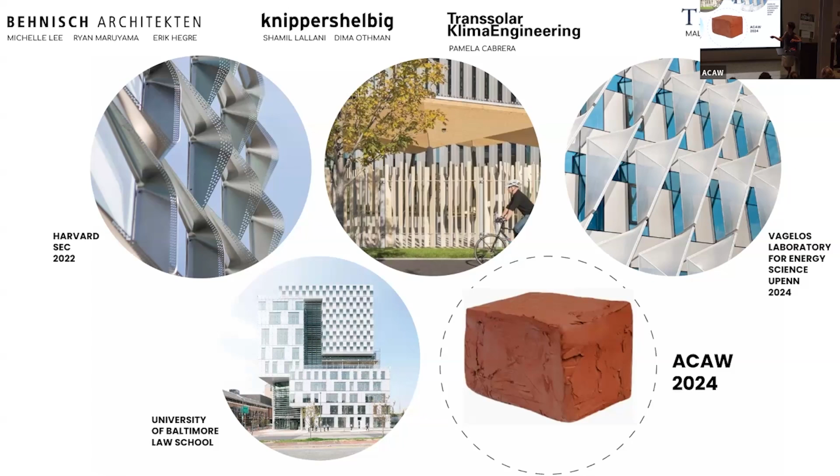I'm going to try to bring in as many of the other presentations into our presentation, just to keep you guys all awake. This is a reference to Gustav's keynote with the Olympics, he had this Olympic-themed presentation that I thought was timely. These are some of the projects we've worked on together with Molly's team, Pamela and Shamil, and we thought Terra would be a great completion of this constellation of work.

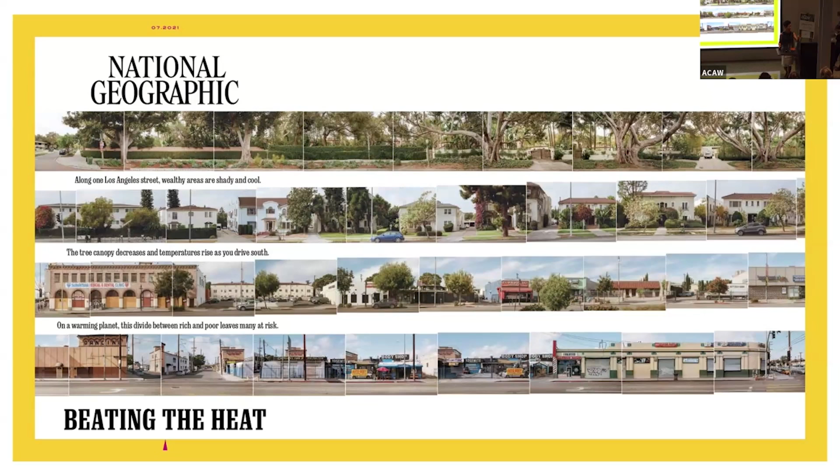With this amazing opportunity, it's such a privilege, and what do we do with this? We thought, in the absence of clients and all these constraints, what's the biggest problem we can tackle right now? For us it's climate change, and in particular the urban heat island effect. We all come from urban cities, Berlin, Lima, New York, Boston, so it's a global issue.

When you think about facades, Mic Patterson has this facade tectonics slogan: better building through better skins. I think we can expand that and say better urban spaces through better facade skins, because the cumulative effect of all this building material isn't just about the people paying for the building and the clients, but about the people occupying these urban spaces.

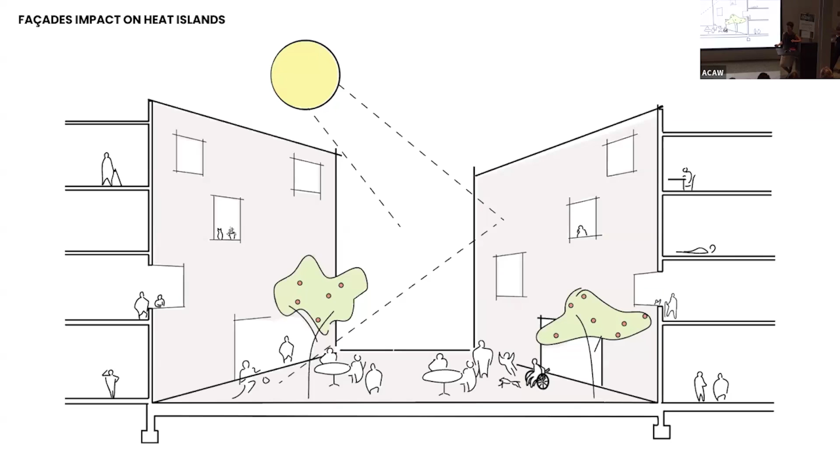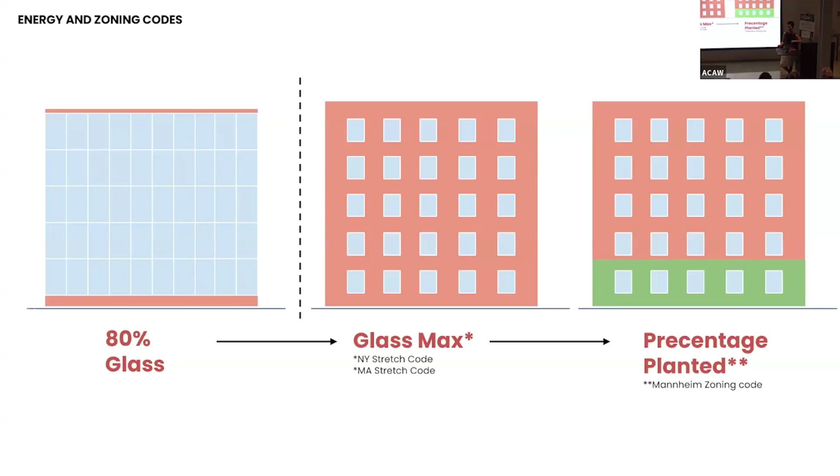Everybody knows this, but the trend is going in our favor. People know that glass is a problem. We're already seeing this being mandated in many progressive building codes. The United States is probably not the most progressive. In Germany we have lots of competitions where we have to actually design green facades or green roofs. This is really important for us.

Play. I don't know what's going on. Ryan made this. Oops. Sorry, the videos are always...

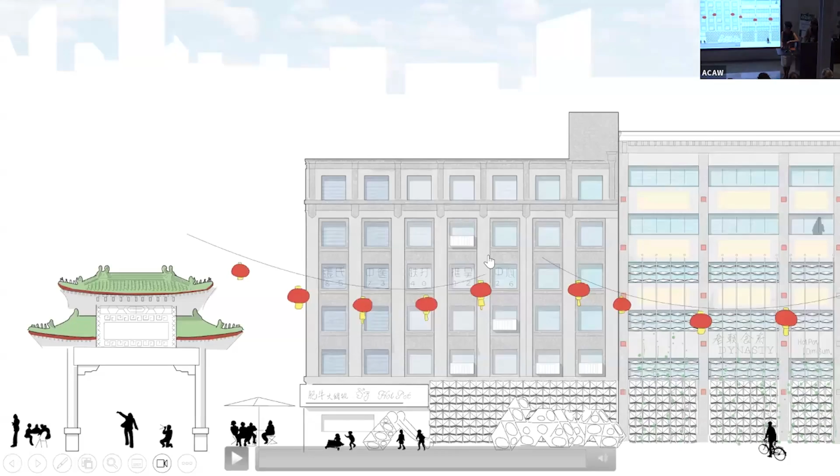There you go. Oh, I just click on it. Sorry, okay, I got to do the two-handed thing.

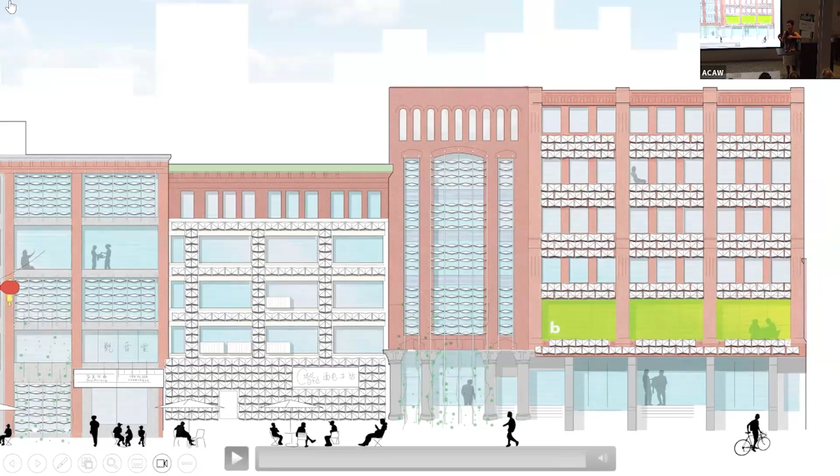Ryan Maruyama from our office made this scrolling tapestry that shows what this community means to us. Our office is right up here on the second floor, so we put this together because they're kind of our clients. Since we don't have a client to design for, we want to address this issue.

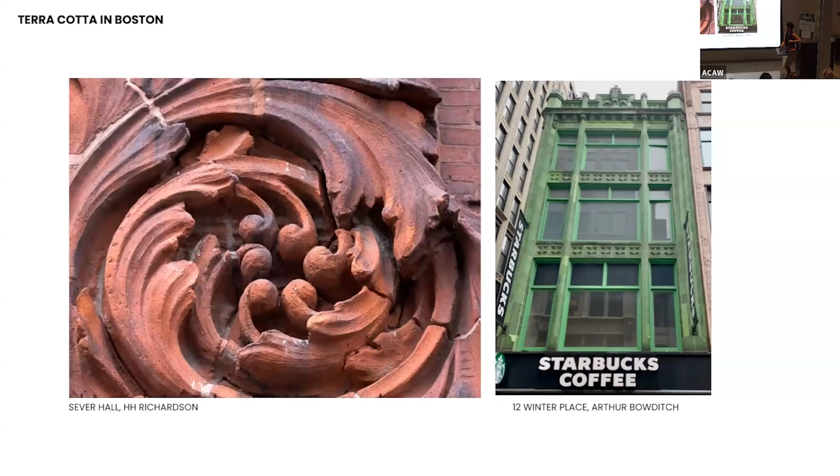Early on we did all these crazy studies - we were so excited. We did these before we talked to Andy and Andrew, and after we showed him, most of these didn't work. He'd tactfully say, is it important that this goes to market? Would you want this to be affordable and mass produced? We said yes, so he said, okay, don't do most of these.

In one of the presentations yesterday, I think University of Michigan told the students to work with the rainscreen - to start with that and build off of it. So we're doing a hybrid between two typologies we know work, that have been around for centuries, and trying to take 2 inches and see what more performance we can get out of that.

So instead of just deflecting the water - we saw the same slide, it's the zeitgeist - we're trying to spread water over the surface like a shingle, but instead of running straight down, we're trying to make it run diagonally and slow it down as it runs through the building. Does that make sense?

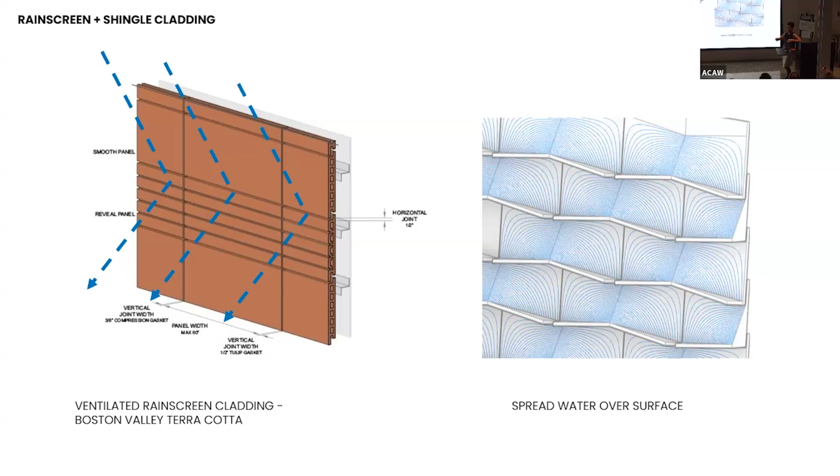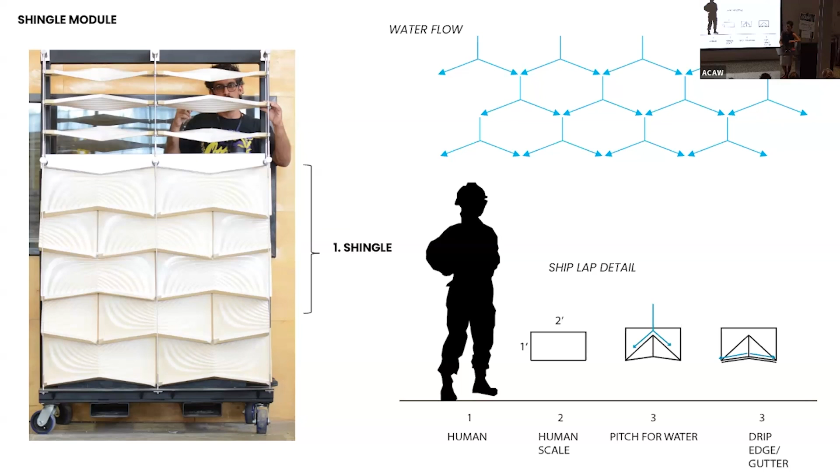So why does the module look like this? Well, first of all, the shingle, the brick - it's an ingenious way to make something modular so people can actually install it with ease. One person, Eric, is the only one who can carry it himself.

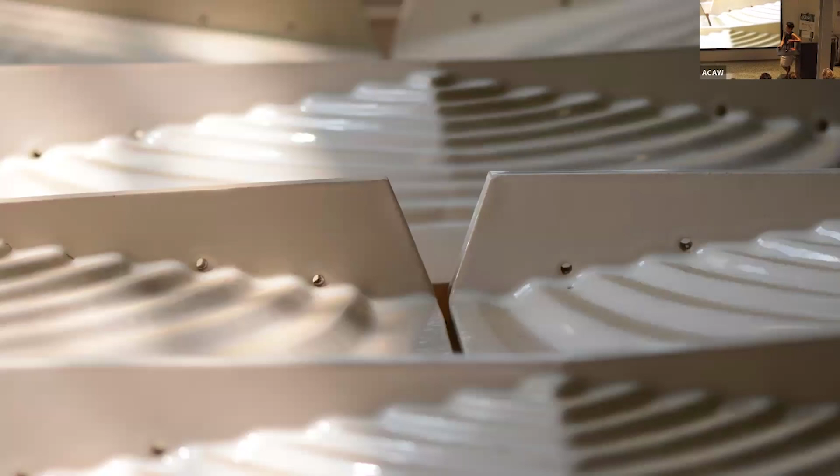This is the perspective from a raindrop. If you're a raindrop, you're traveling down this ridge, then you go to the sides where we turned up the lip of the shingle, then travel through these miniature canals, these grooves, and into the weep holes. It's about slowing the journey down, if that makes sense - just playing with gravity and movement of water.

So the second module - that was the first module. The second module is a little different. If you look up close, they're not the same - it's kind of inverted, with little textures made to absorb more water. These are allocated at the lower part of the building where people hang out, because we don't need evaporative cooling where there are no people.

We were also looking at these amazing, bizarre rusticated podiums you see in Renaissance and neoclassical architecture, with weird grotto patterns. They're always at the base of the building because they reference the earth. At the top here you can see a little more detail - this is one of them installed in the shingle method.

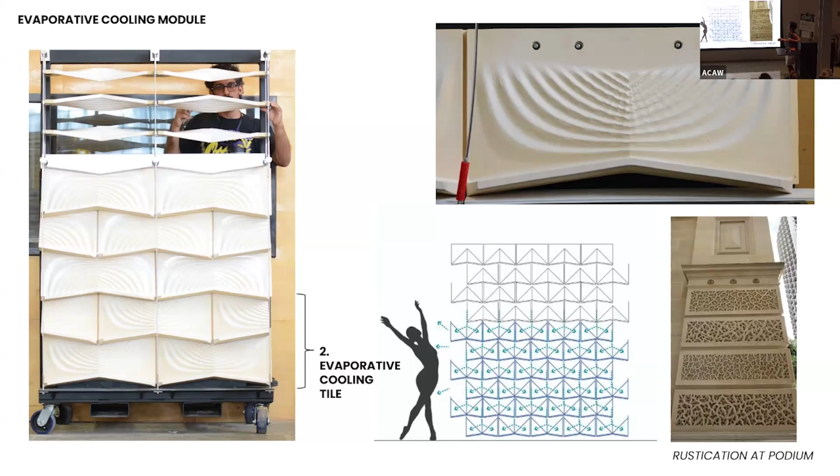And then the third module, at the top - wait, I don't think this works when you point the laser at the model. The top one is the screen module, and it's a way for us to integrate apertures and think about sun shading, while working it with this opaque surface that we have.

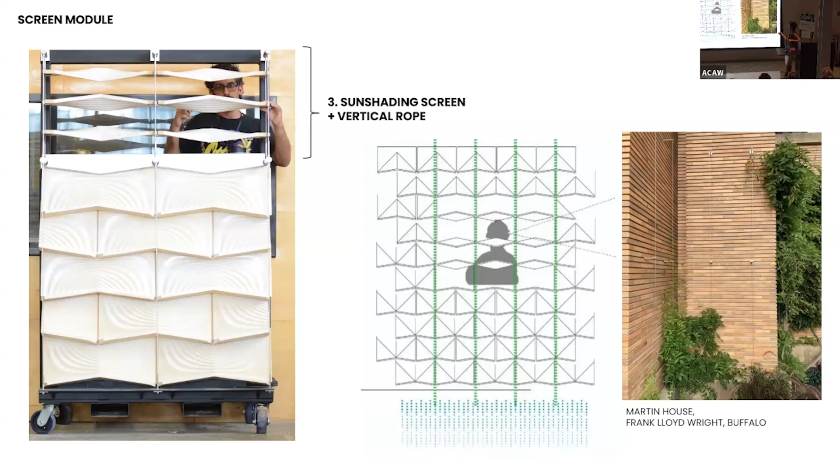We also decided to incorporate these trellises to continue the green planting theme from last year, but not make it an actual planter, because in New England that wouldn't work - freeze thaw issues. So these are easy Ivy League type light trellises. The picture on the right I took at the Martin House during our evening there - they have the same system we have. I'm pretty sure we came up with it first.

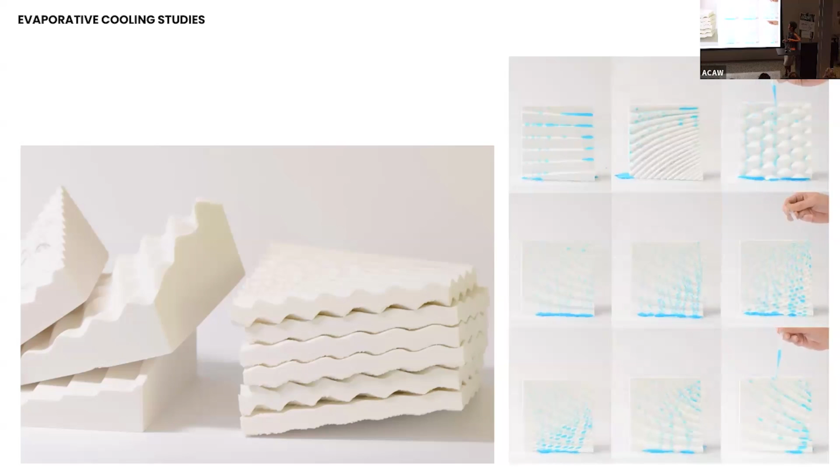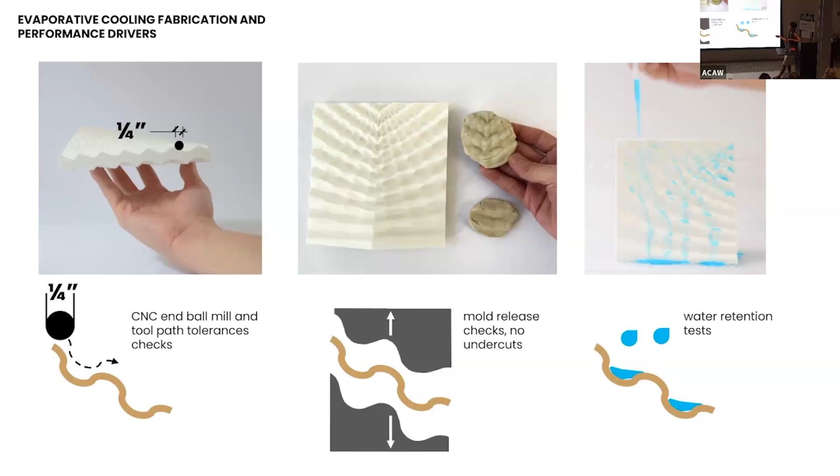We saw that with a professor from University of Michigan's presentation, Professor Ng - these beautiful woven things. We tried to do it in the texture of the surface so it can function as a rain screen, and also for mold release. So toolpath, mold release, and water were what drove the design. A little bit about working with Andy Brayman.

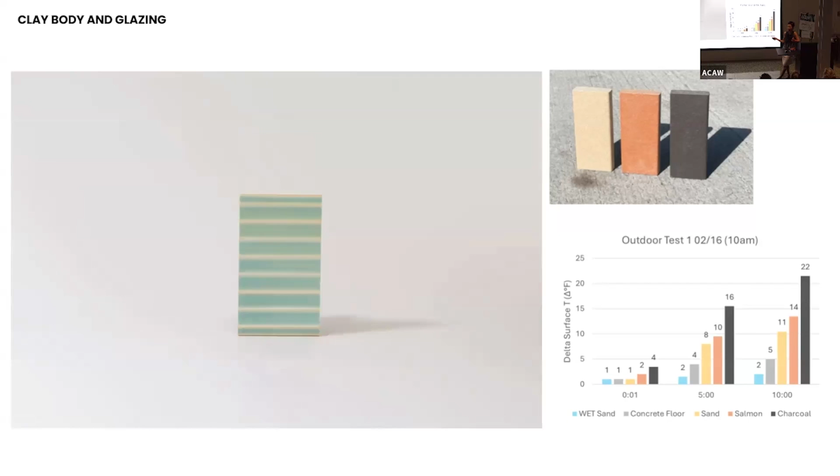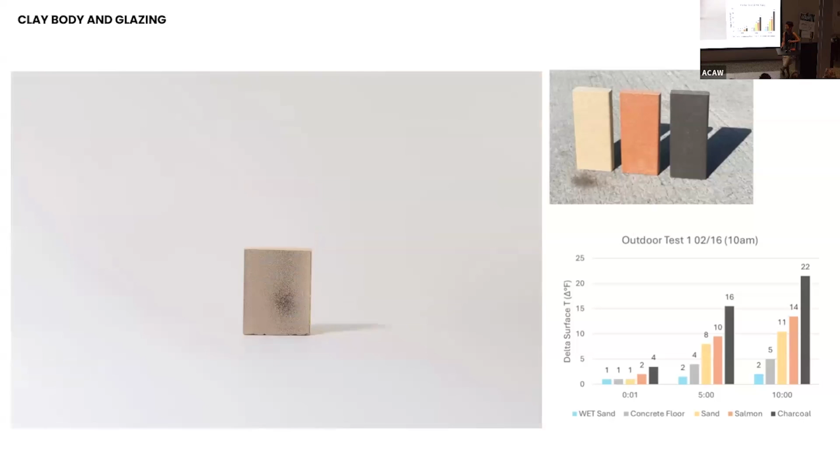Hi Andy, so these were all the glazes we were looking at, and we actually wanted to do some amazing color. I love Celadon cobalt, but we realized it was toxic and terrible. We wanted some amazing texture, but unfortunately science told us that the lighter the color, the more reflective, as the UN Studio people presented really well, and that's what we wanted for the step form.

So we actually only glazed the top, like the eyebrow, because that's where the sun hits and you want the sun to bounce off of your eyebrow. And then in this part, you want the water to stay there. So that was the concept.

I love this construction document that we sent to Boston Valley at the conclusion, where it's like, spray the tile from here, try to hit it. And Matt from Boston Valley, when we saw them on Monday, we were blown away. They came out so much better than I thought they would, especially with this kind of direction.

So the idea is to glaze the top like a glazed donut, get the sun to bounce off, and use the clay body to absorb as much water as possible. That was the concept.

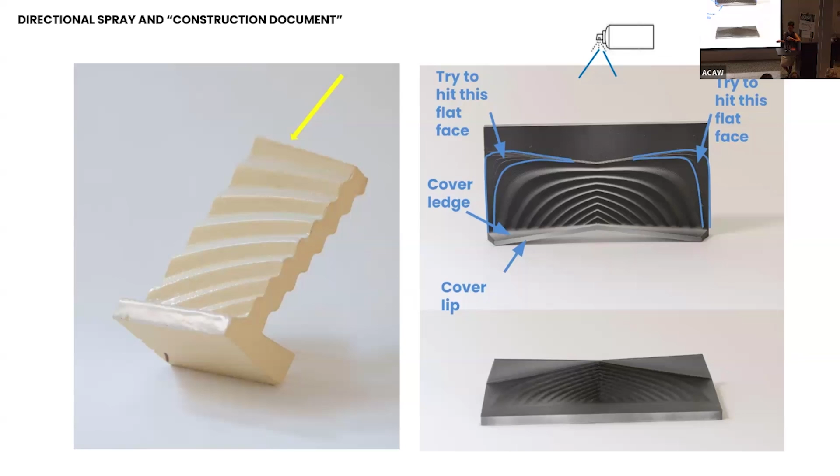Shamil. Yes, luckily I'm not wearing the same shirt in this picture, but there might be other ones where I am. I guess everybody's in that boat at this point this week.

So the support systems, this is just us assembling, but looking at a typical wall section, we really wanted to develop a system that we could put on a building and adapt to all the different wall types we would have.

So the main opaque parts of the building have a shingle tile that's just face nailed, similar to clay roof tiles. And then the other part is a lightweight cable wall with a tile screen that can provide shading over the glazed areas and also for roofways. Otherwise, the tile system is a typical kind of rain screen system.

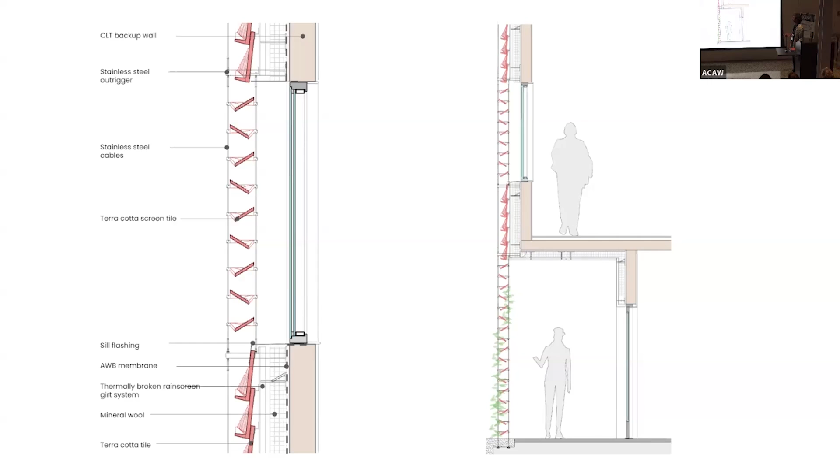So it's current technology, but bringing all of the parameters that Michelle talked about into this kind of idea that can just be applied to a project.

So these are some really awesome fabrication drawings from TriPyramid. Thank you, Molly. And we wanted to incorporate both of those support systems into the prototype.

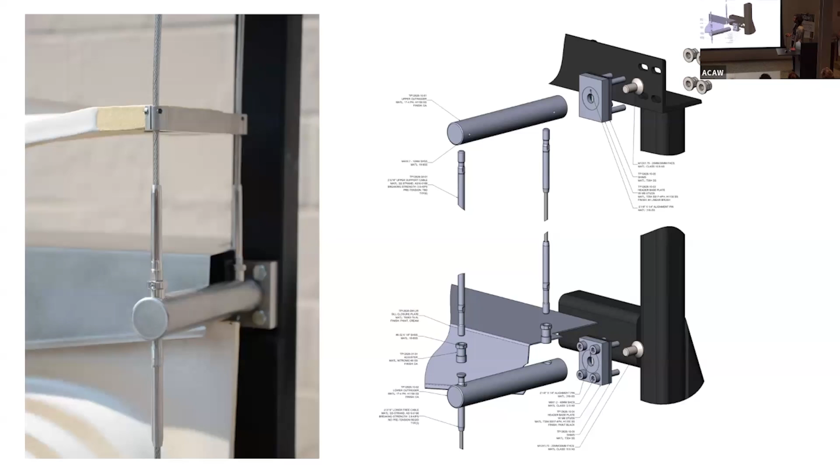Zooming in on the hardware system, our goal was to minimize it as much as possible and foreground and highlight the terracotta. I think we were successful in that. And TriPyramid, obviously, we're working with the best in the game, so that was never in question.

This little detail right here is the stainless steel outrigger. It looks like a continuous cable from top to bottom, but there's actually two cables with a special coupling. The upper cable, which is load bearing, is pre-stressed, whereas the lower cable, which is not load bearing, we can install without any pre-stress.

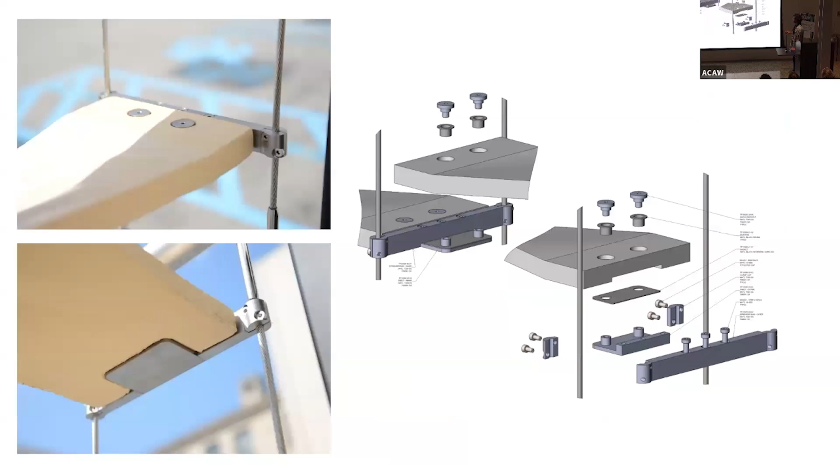And the cable clamps, another little beautiful detail from TriPyramid that we worked on with them. We're really OCD about this detail, and Molly was very patient with us as we kept asking for the screws to be smaller. She was like, you want those screws even smaller? We had a little back and forth.

But yeah, so we wanted to keep the height of that spreader arm in line with the depth of the tile, so it kind of just disappeared as much as possible. We did a bit of engineering at Knippers Helbig, and TriPyramid did some of the hardware FEM.

We did the cable wall analysis, and one of the things we tried to do in general is consider responsible window to wall ratios. We wanted to keep our glazed openings to about 6 feet max, which also helped keep the tension forces in the cable wall down.

And the cable wall is a really lightweight system. We'll look at the embodied carbon of it in a minute, but we didn't want to introduce really high tension forces, which would counteract the efficiency of the cable wall by requiring us to have a really beefed up backup structure.

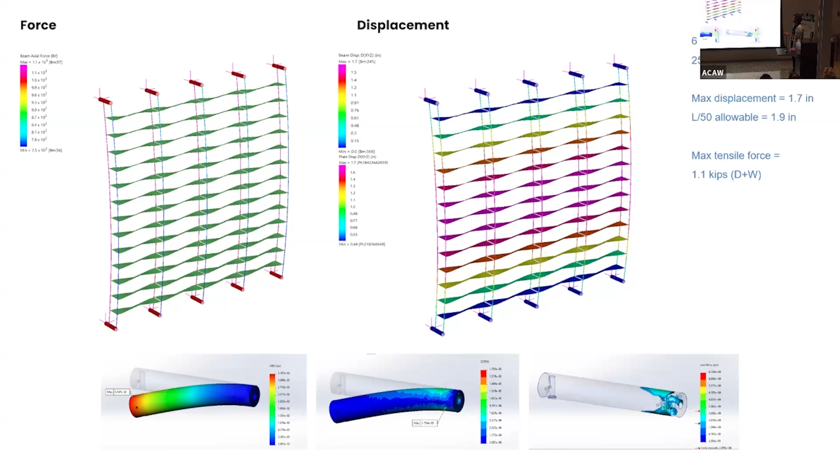I'm just going to talk a bit about the circularity and embodied carbon emissions of our design.

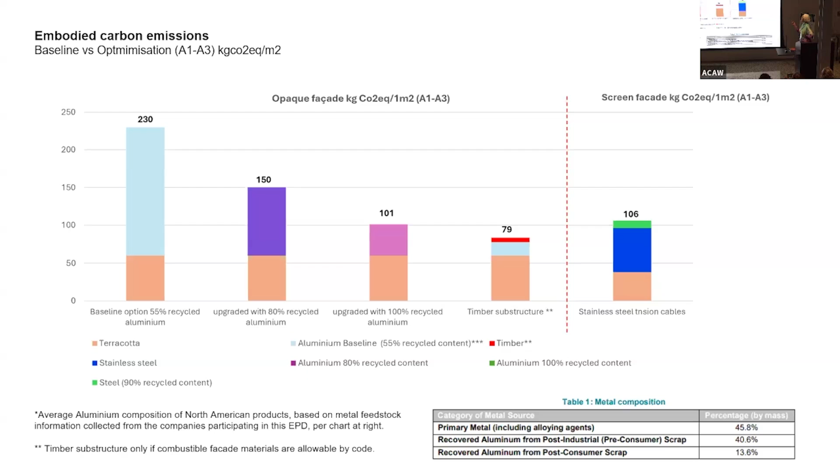But if we go for the timber substructure, we can end up with 79 kilogram CO2 equivalent per square meter. Of course, you have to check if it's allowed according to the codes in North America. And then you can see on the right that the stainless steel tension cables can even reduce half of the carbon footprint of the module.

For circularity, the basic rule is we want to reduce virgin materials as much as possible and increase the recyclable content during production. We also have to think about increasing the recycling potential of material at the end of life process.

At the beginning, we had 58% circularity, where the terracotta tiles were downcycled as crushed aggregates because we had the glazed terracotta. When we reduce the terracotta glazing to less than 1.5 millimeter, we end up having 100% recyclable terracotta. And if we add also 100% recycled content for the aluminum, we end up raising our circularity to 81%.

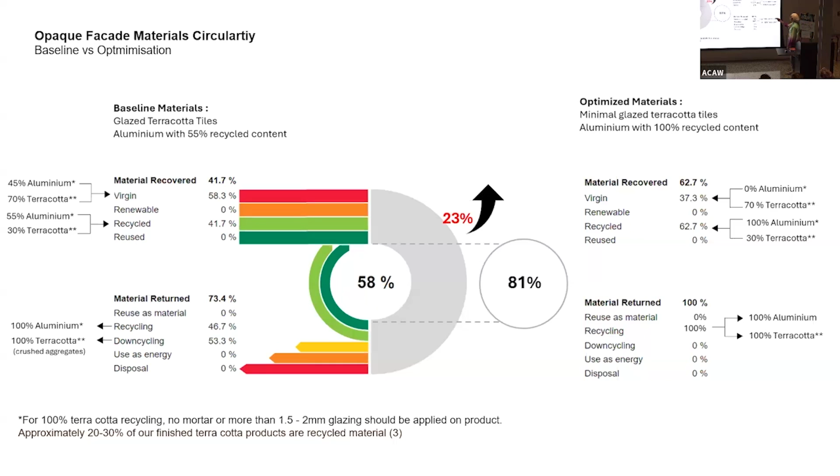Hi everyone, my name is Pamela. I'm from Transsolar, and I'm going to go back to one of the main topics driving our design that Michelle introduced at the beginning, which is the thermal performance of the facade.

Going back to basics, understanding comfort is first about how we impact outdoor comfort in our cities. It's not only about air temperature, but all the different factors that impact heat loss and heat gain to our bodies: air temperature, humidity, but also the surface temperatures of walls and surfaces around us that define the mean radiant temperature, air velocity, and other things like clothing value and activity.

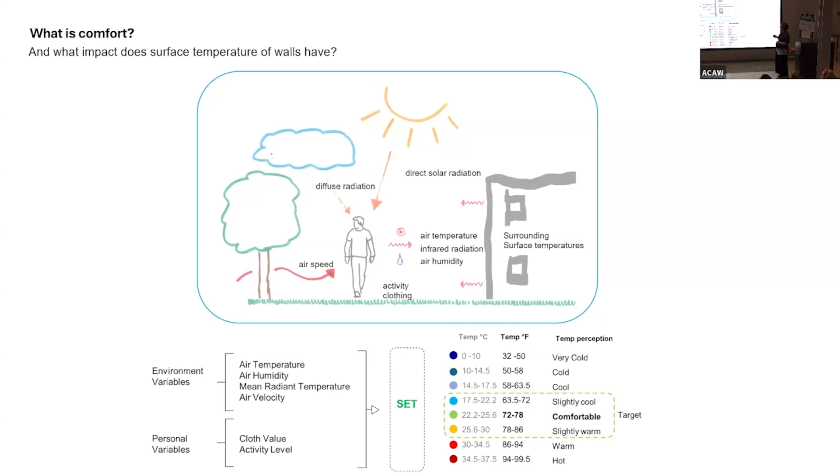There are different metrics, but right now for this study we're using SET, the standard effective temperature. It basically defines the perceived comfort temperature of a space so you don't rely only on air temperature, but on what it actually feels like.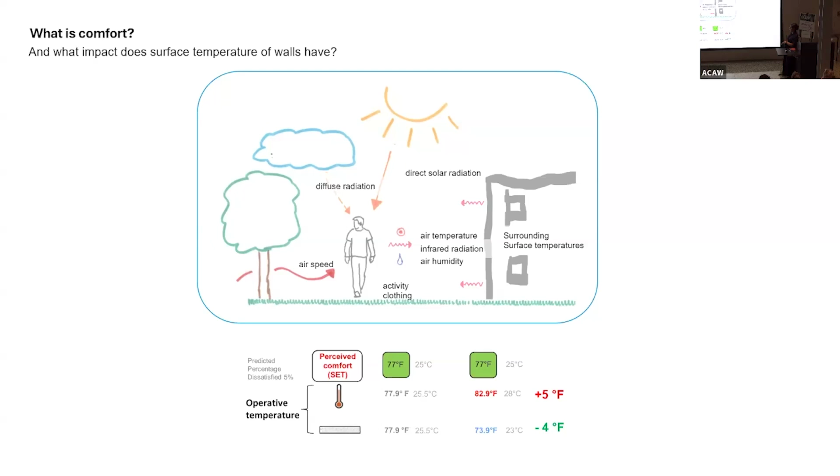So in a simple example, we can compare how the same space with a higher air temperature going from 78 to 83 degrees Fahrenheit can feel the same if the surface temperatures around you are decreased by 4 degrees Fahrenheit.

At the beginning of our studies we did many tests with samples received from Boston Valley Terracotta, analyzing how cool the surface temperature can get, related to the glazes and bodies. What's interesting is we were able to reach the wet bulb temperature of the experiment conditions, showing a delta of 18 degrees Fahrenheit to ambient air temperature. In the mock-up testing, we also saw similar reductions of surface temperature from air temperature.

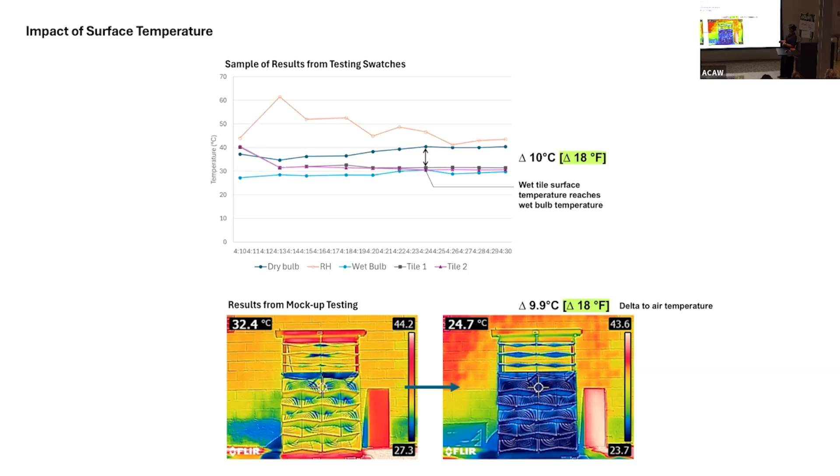Here you see the starting condition at the beginning, where the wall was the same temperature as the wall behind it with a similar color. After 5 minutes, and then an hour, you'll see more about this, it was reduced by 18 degrees.

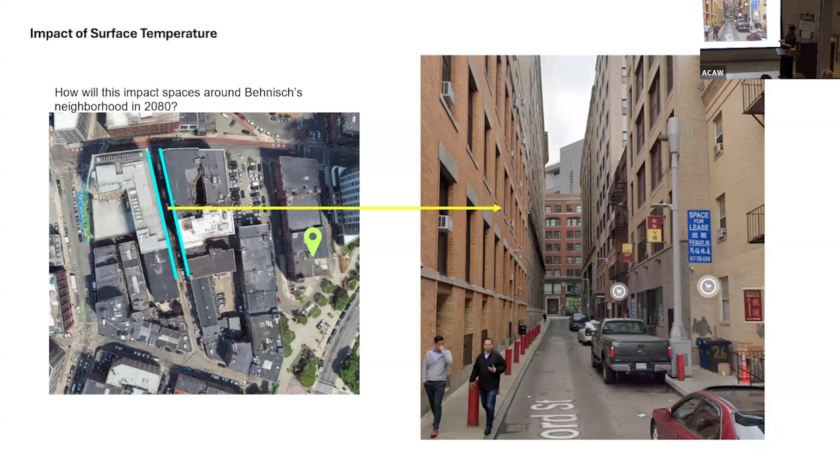We wanted to simulate this in an outdoor condition, so that's the Behnisch office right here, in the Chinatown neighborhood that Michelle was talking about earlier. As a first step, with many more studies that should continue after this, we looked at a canyon condition of buildings with brick facades, evaluating the outdoor comfort and SET at several points across the sidewalk and street with different surface temperatures.

Based on the experiments and how cold we can get the terracotta facade compared to the wet bulb temperature, I'll go a bit fast due to time, but we analyzed how those temperatures changed throughout the day. Here we're looking at the hottest day using the amorph weather file for future conditions of 2080, because what we're talking about isn't historical conditions, but current conditions as they get worse with climate change.

You see that the SET reduces from 97 to 94 on the warmest day of the year in that future condition—still pretty warm. But on the sunniest day, a typical summer condition, the SET goes from feeling like 79 degrees to 76 at 4 p.m. in the same alleyway.

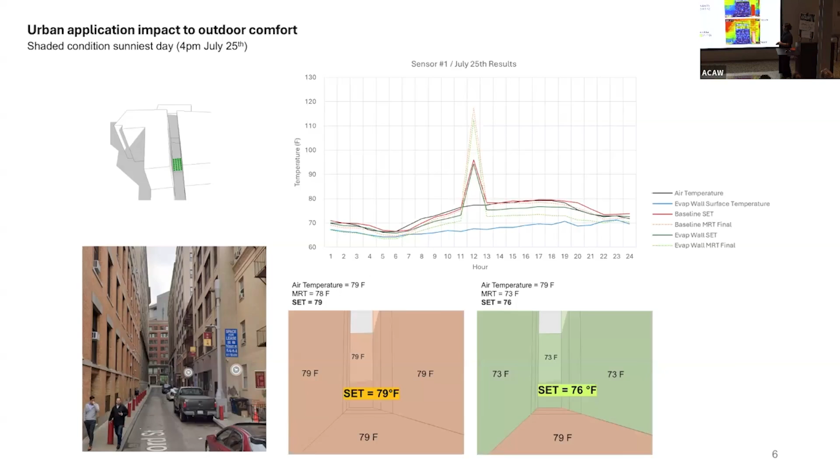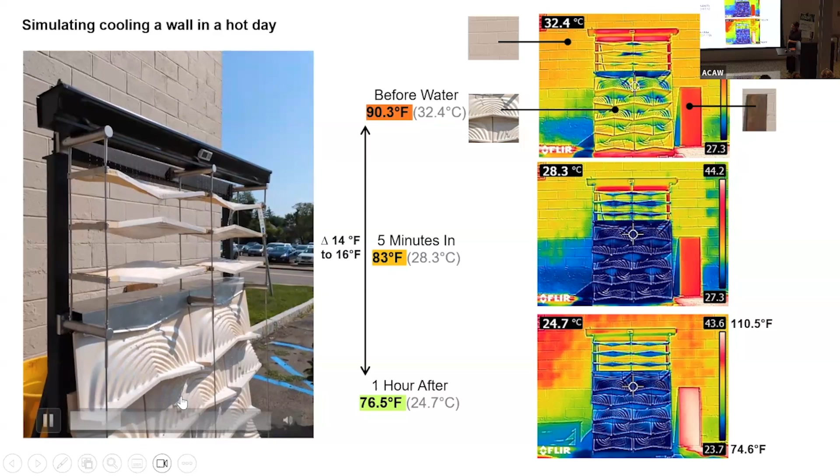Yesterday we did a couple more studies, so here's a little video of how the facade performs with water. The way we anticipate this design to perform is in a couple ways: first, to prolong the cooling effect of rain events on the facade as a rainscreen facade with a lot of absorption and reflection from some of the glazes, but also that it could be activated on demand on hot days when you want outdoor comfort.

What we see here is we're comparing the back wall, same color, but painted CMU, our module, and a rusted steel surface. This is the starting condition at the same temperature of 32 degrees Celsius, or 90 Fahrenheit. After just 5 minutes, that 90 degrees was reduced by 7 degrees Fahrenheit. One hour after, there was a delta of 14 to 16 degrees, depending on where you were looking, between the evaporative cooling tiles and the screen tiles and shingles.

We did another test looking at this rain condition when everything was wetted. Right after the rain, the thermal mass of the wall was greater, so it still remained hot, but there was a delta T of 20 degrees Fahrenheit from the original state. After 2 hours and 40 minutes, the surface stayed cool below air temperature, with a delta of 22 degrees to surrounding surfaces.

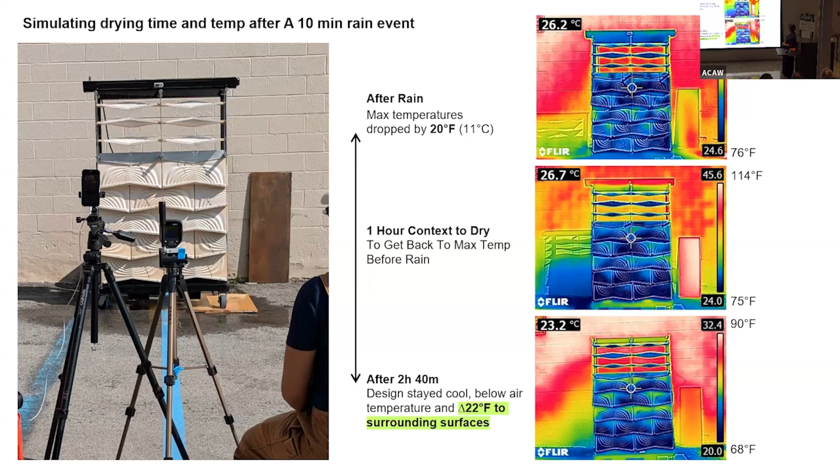Just to conclude, I think it's really interesting, and only the starting point, because there needs to be a lot more tests based on the mockup that we have. What's really interesting is that the shingle tile performs differently than the ECT, the evaporative cooling tile. Here you can see this was one of the pictures after 1 hour of testing, after the rain stopped, and the evaporative cooling tile remained cooler than the shingle tiles, which is really interesting as we want to enhance the performance where people are staying.